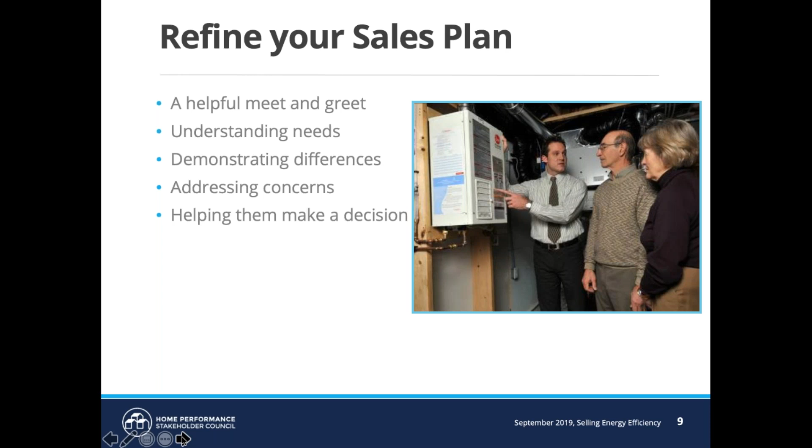But we might change the way we ask questions, or the way we demonstrate the products or services we're selling, based on the fact that we know they've been motivated by energy incentives or at least energy efficiency. So I hope you all have a defined sales plan. If not, I'd encourage you to take some sales training. But assuming you're using a defined sales process now, let's find a way to refine it to include those energy efficiency messages.

I said I wanted to start with what's changed in the industry, and give you a few things I think your homeowners need to understand. A classic example: when we started building houses generations ago in Canada—not necessarily lower mainland, but elsewhere, and even in the lower mainland—we started building basements, and those basements were never designed as living space. I suspect some people on this call make a pretty good living turning those basements into living space, but it's not easy, is it?

We're asking people to live in holes in the ground, and holes in the ground are wet and cold. We need to think about ways of ensuring we meet people's expectations, and that's obviously in the energy efficiency world. For the HVAC folks on this call, we're trying to improve comfort in people's houses.

Yet our duct systems leak at the rate of 25 to 30%. I know some on this call will say, 'No, that's not me, I do a better job.' But surveys have been done all across North America: properly installed, properly applied sheet metal ductwork still leaks at 25 to 30%. So if we're going to make comfort guarantees, we have to respect that 25 to 30% of the air currently going into the system never actually ends up where you want it to go—it leaks out along the way.

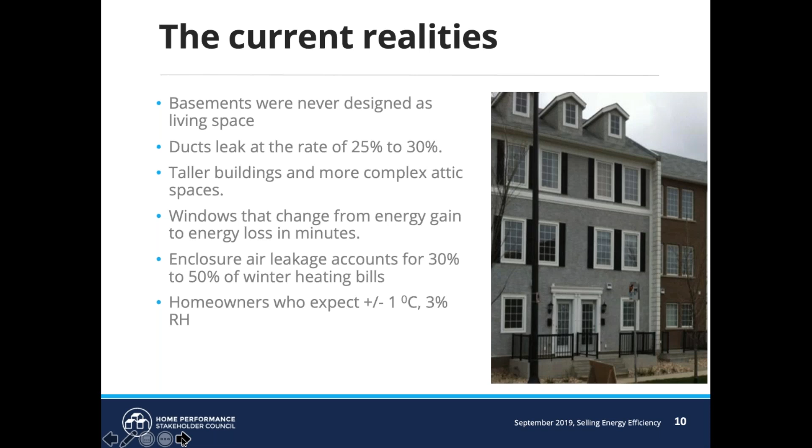I don't mean to overplay this. I just want us to be conscious of it, and you've all taken training as part of that Home Performance Stakeholder Council. You've had access to a lot of training that would say the challenges in houses are great, and they're getting tougher given the realities of both the changes in houses and the expectations of consumers.

So I would say we need to respect the changes. As an example, under the federal government programs run in the early years - finished in the Harper era - the EnerGuide rating system, what was called EcoEnergy, rated over 1 million houses in Canada. I don't know if you remember that. Under that program, people were given incentives to have an energy rating done on their house.

You guys had a fantastic challenge program out in BC, and it created a lot of interest. People had ratings done in their houses, then tried to improve their houses, and that increased the overall knowledge of people and increased their expectations of what could get done. It also helped people understand whether their house was indeed energy efficient enough - I'll come back to that in just a second. Of course, in the meantime, codes have changed significantly, and you guys probably have an appreciation for this.

Houses built in BC in the year 2000, under the 2000 building code, use twice as much energy as a new house built today in the Lower Mainland or in BC in general. Our codes have changed so much that houses use half the amount of energy that they did even as recently as 15 to 20 years ago.

At the same time, we put in more windows, bigger and better windows, and I don't think we're going back to fewer windows anytime soon. Those windows can be both good and bad from an energy perspective. We have to remind ourselves that windows are an intermittent load—they have advantages, but also challenges in cold weather.

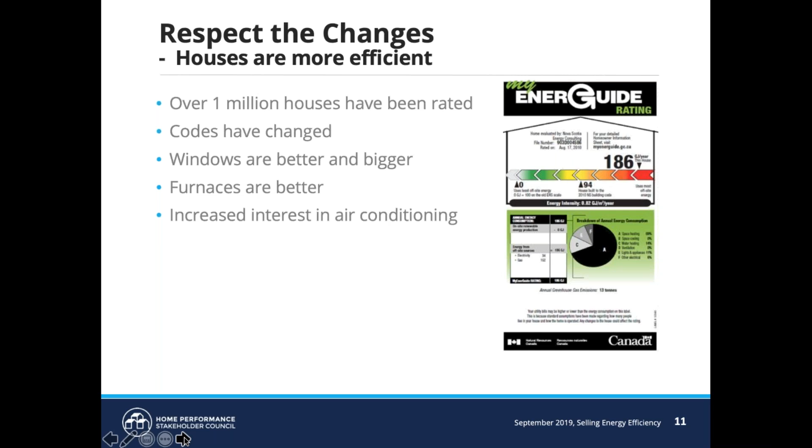So it's important to understand those changes. And of course, we're doing more and more multifamily—you guys are going to see more and more of that. Houses are taller and thinner. We have more glass, more plumbing, more lights, more appliances. It's changed the nature of energy use in houses.

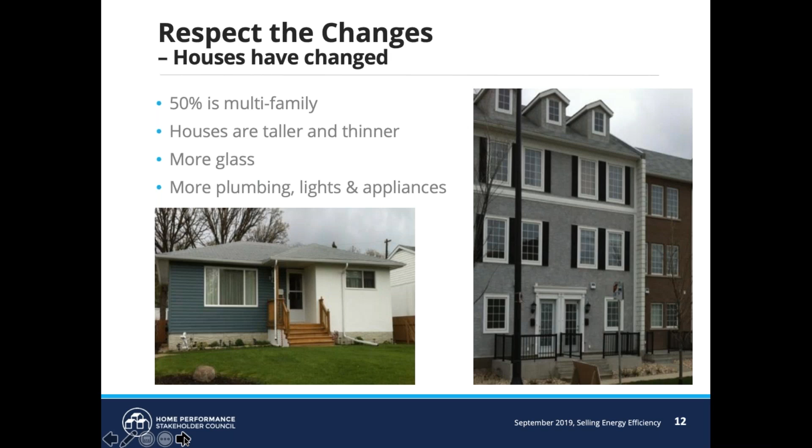I just want us to be conscious of that in our training and education of homeowners, to help them understand that houses have changed. The house that they grew up in is not necessarily the way the house they're living in now is going to work, and we need to manage the expectations of those clients.

And of course, this does impact the expectations of homeowners—the airtightness of buildings, for example, with more windows, and the amount of ventilation that we need. People often blame the need for ventilation on the fact that we've made houses tighter. It turns out that's not actually true.

The reason we have the need for ventilation in houses is because people stopped ventilating their houses. I can say that because somewhere along the line we stopped opening windows. Even in your idyllic Lower Mainland climate, and in many parts of British Columbia, if you said to somebody, just leave your windows open 24 hours a day, they would say no—noise, dust, security issues. So it turns out all houses need mechanical ventilation, not because we've made them tighter, but because we've stopped opening windows.

Keep that in mind as a sales opportunity and as a way to understand the expectations of homeowners—the fact that they don't really recognize it was their change of habit, not the change in the house, but their change of habit with respect to windows, that makes this more difficult.

As I've mentioned, you're going to see more and more interest in air conditioning. Why? Because of more and more windows. That changes the heating-cooling mix in houses. And lastly, the sensible-latent mix. You guys have always had a humid climate, but it's getting even more difficult. Why? Because you've reduced the sensible load—the heat load through windows and walls—but you've increased latent loads because of more lights, more appliances, and mainly more plumbing in houses.

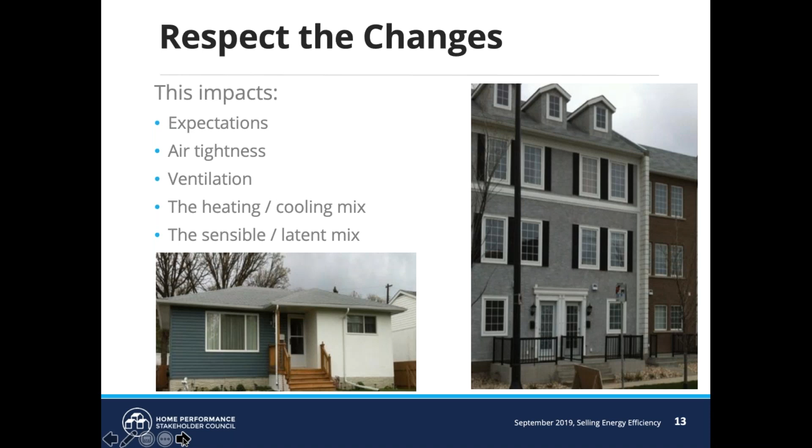So respect those changes is what I'm asking you to do. And the comfort expectations are much higher than they used to be in terms of moisture control and temperature variance.

If I was there with you, I'd be asking you right now: what are our customers' expectations with respect to temperature variances between areas of their house? I think all of you would agree it's 1 to 2 degrees at most. And what are their expectations for quiet or noise control, indoor air quality, and service? If we said to them, we'll be back to you within 48 hours if your furnace craps out, they're going to say that's not good enough—I need you here now. And of course, lastly, the knowledge expectations are higher.

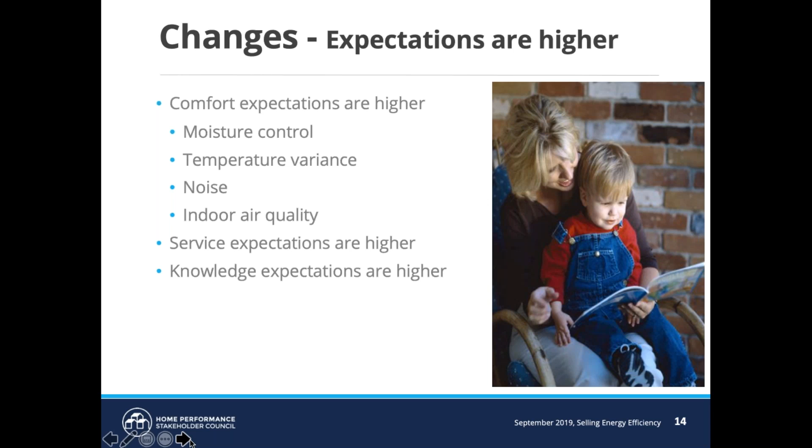I say that because of the work being done by Fortis, BC Hydro and others, there's lots of awareness about energy efficiency and climate change. So their expectations are higher for your knowledge levels. They expect you to be the experts, and we need to respond to that. So I wanted to share just one little piece.

I mentioned windows as a comfort challenge, and here's why. We sense the temperature in our buildings with a thermostat that measures air temperature, but our bodies sense temperature differently. Our sense of comfort is partly related to perspiration and humidity levels—about 15%. About 35% is associated with air temperature. But as much as 50% of our sense of comfort is associated with the radiation of the surfaces that surround us.

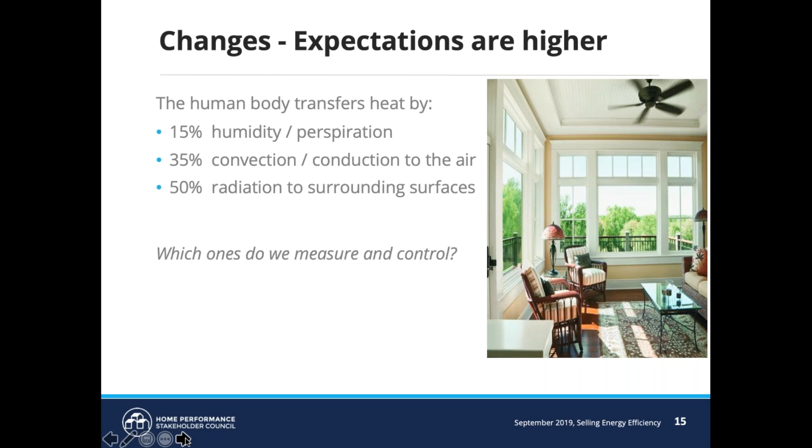That's why the opportunity with windows is picking the proper glass that manages not only heat loss and heat gain, but the surface temperatures of that glass. So window folks on this call, start understanding and helping your clients understand the value of proper low emissivity coatings—the choices you now have to optimize not only energy performance but comfort performance. That's a fairly long conversation about the changes that have taken place for our buyers.

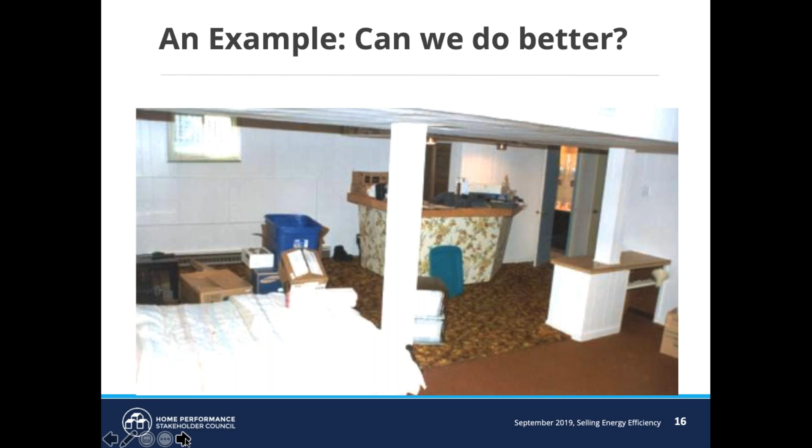But I'll give you a practical example. Think about this basement—done in the 70s. You can all see this, and you can probably smell it too: the must, the mold, the moisture, the dampness. If we're offering more energy efficient basements, can we do better than this? If I asked you to describe the atmosphere in that basement in four words, you'd agree: cold, damp, dark, and musty.

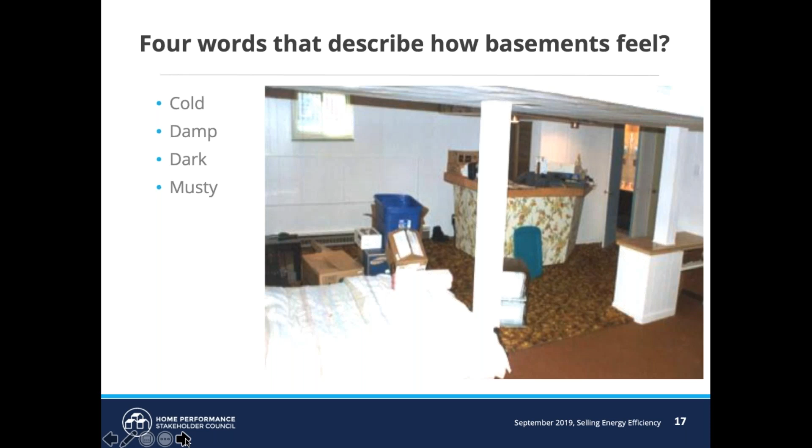If you offer an energy efficient basement renovation, clients are going to want that basement to end up warm, dry, bright, and healthy. So how do we do that? It comes down to understanding the science of how basements work.

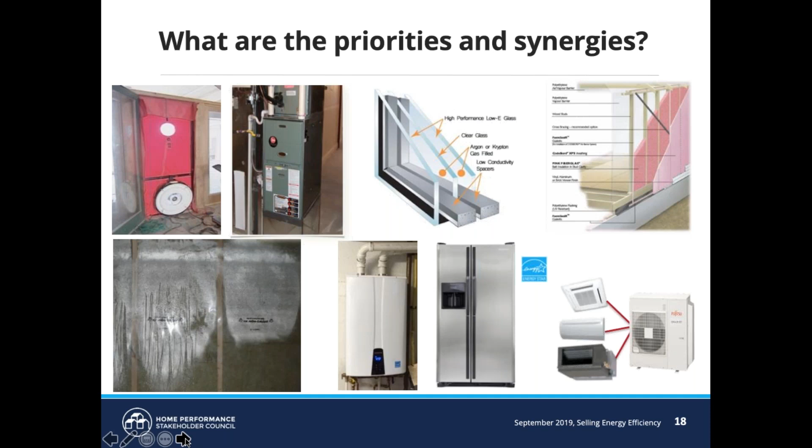The good news is you are with a group, the Stakeholder Council, that embraces building science—understanding air, heat, and moisture flow in buildings. Canada has done more work than anybody else in North America, even around the world—our building science is second to none. We've been doing this a long time. I recently met the inventor of the blower door from Saskatoon, Saskatchewan, Harold Orr, recognized through the Order of Canada for his contribution to the overall efficiency of houses, not only in Canada but throughout the world, for his work on air leakage and its impact on buildings.

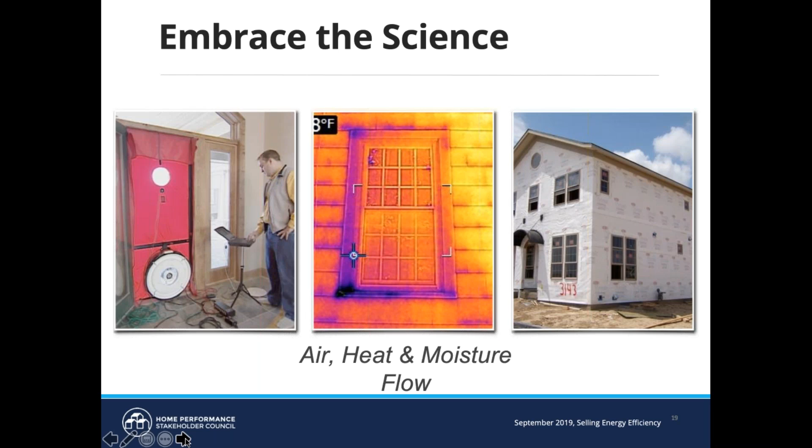So embrace that science—always use the science with your clients. As I said, when you think about that basement challenge: moisture sources, soil dampness, rainwater, construction moisture, water vapor, condensation-related cool basements—how do we manage that to help customers make good decisions?

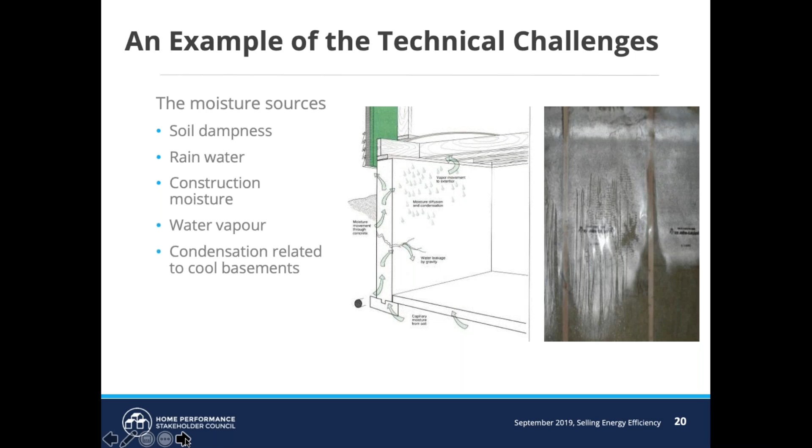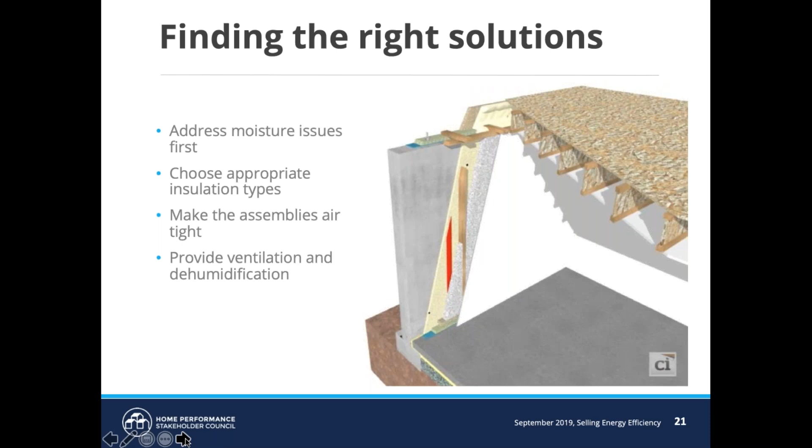So finding the right solutions to address moisture issues, choosing appropriate insulation types, making assemblies airtight, providing proper ventilation and dehumidification. What I'm getting at here is we have a new reality, new expectations. If you're going to sell an energy efficient project such as a basement renovation, let's make sure we're embracing the science, understanding that we have to solve the moisture issues first before we can add insulation.

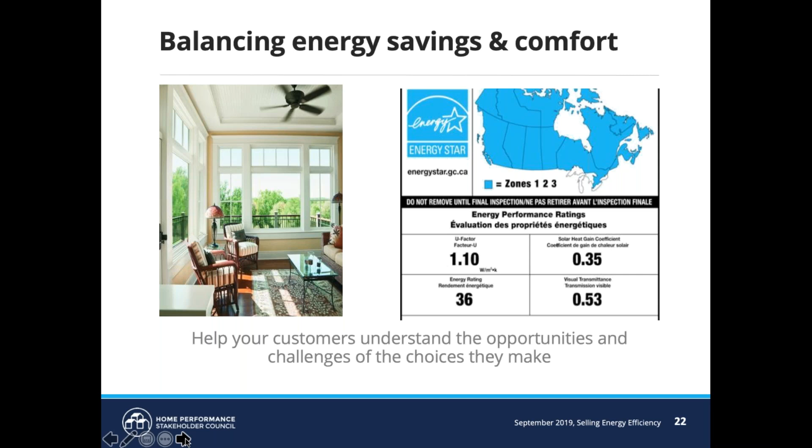So that was a fairly long preamble. When we think about how we're going to make those kinds of decisions, another example is windows - making sure we choose the proper windows, helping our customers understand the opportunities and challenges of the choices they make, finding the right combinations of glazings to help them make good decisions. Looking at this example, the window folks will recognize this.

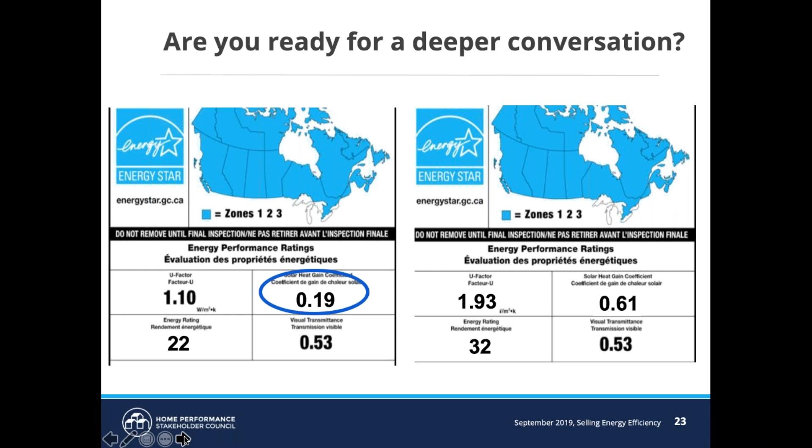So we're going to have to be responsible. The window folks are going to have to talk to the HVAC folks, because if you're going to put in glass at 61% heat gain, there's probably going to have to be a conversation about needing air conditioning in that house for at least some of the summer. So helping with that conversation is where we want to get to. I should have circled those earlier, but that's the conversation we have.

Logically, if you ask folks in general, 59% of people say they are interested in the dollar savings associated with energy efficiency. They all claim they're interested in energy efficiency, in the savings associated with it. But unfortunately, in a sales conversation, they're seldom motivated to do so. I suspect everybody on this call will recognize this - we talk about energy efficiency, homeowners say they're interested, and then ultimately they make decisions that aren't energy efficient. And we wonder why that is.

Well, here's why. First and foremost, they already think their house is energy efficient. Remember I said over 1 million people had their houses rated in Canada? They all think now their house is energy efficient - they think somebody came in, even if they didn't do anything, they still claim my house must be energy efficient because an energy advisor came and told me what I should do. Did you do any of those items? Well, we only did the light bulbs - but they still think their house is energy efficient. In fact, when surveyed, people think any house built after 1990 is as efficient as it can possibly get. Isn't that amazing? Think of all the improvements we've made even in the last 5 or 10 years, and yet they think that house is already efficient.

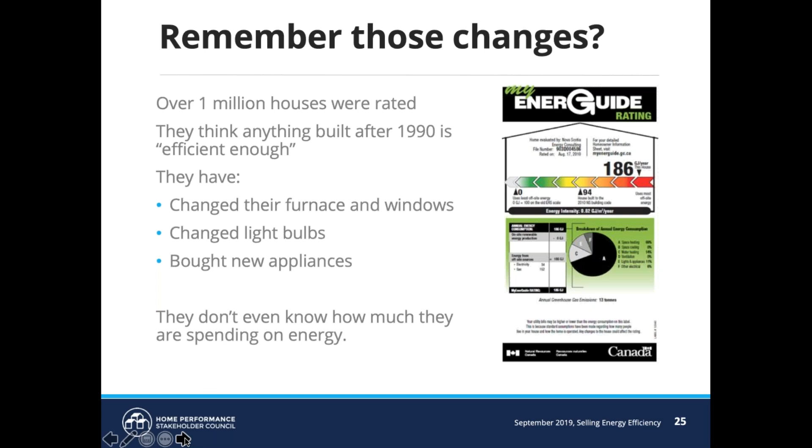So remember those changes. They already had their house rated, perhaps. They think their house is already energy efficient. They've changed the furnace, perhaps, the windows. They've probably changed some light bulbs. They've bought some new appliances, and they don't even know what they're spending on energy now. But they already think when you say save 30% or 20%, whatever the number you give them, they're really not tied into that. They're not cluing in. They don't necessarily believe you.

So that's our challenge when we're doing this. And a little example of that, there's a great group - if you get a chance, download, go to the sheltongroup.com, and Suzanne does a bunch of surveying of energy efficiency objectives and perceptions, mainly of Americans, but most of it rings true for Canada as well. One of the surveys she did, she started asking about some of the terms that we use. Everybody on this call will know what a VOC is, and we'd all want low VOCs. So she actually tested that amongst homeowners, and here was the problem: very few of them knew which products emitted VOCs.

21% said they understood the term, they didn't really know what it meant, but only 54% found this term undesirable. In other words, they thought they wanted high VOCs. They didn't want low, they wanted high. The point is they're confused. They don't know the words we're using. We throw words out all the time - AFUE or low E glass or solar heat gain coefficients. They don't really, even R values, they don't really understand what those terms mean.

Here was a more interesting one. You guys know in Vancouver specifically, you guys are going to be at net zero houses by the year 2030, probably at the latest. When surveyed, the term net zero, 30% didn't expect energy savings and didn't know there were other benefits of the word net zero. Only 30% said they understood the term. And here was the most fascinating part: 24% thought this was a good thing.